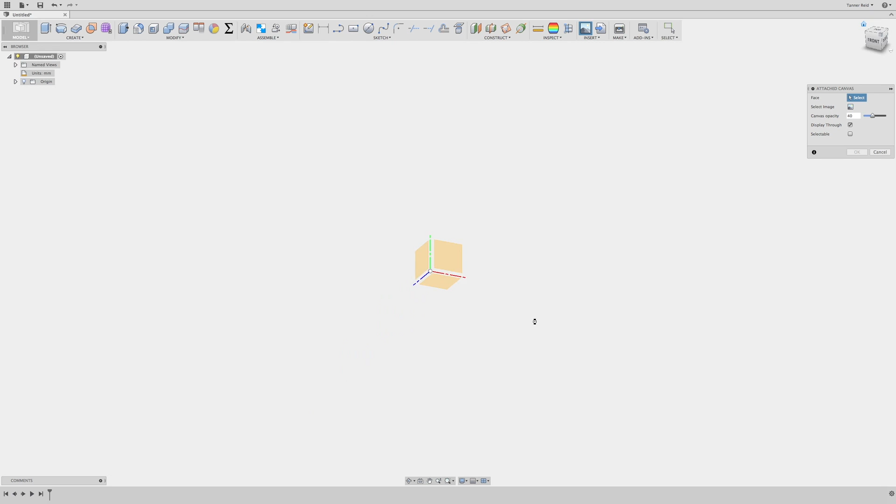So we're going to start off by inserting an attached canvas. If you haven't used these before, they're a really great tool. It lets you pick a certain face in the space. In this case, we're going to use one of our origin planes.

And when you choose an image, it's going to import that image into Fusion, and you can scale it and move it around and actually design off of it. So it's sort of like a reference in space for you to work from.

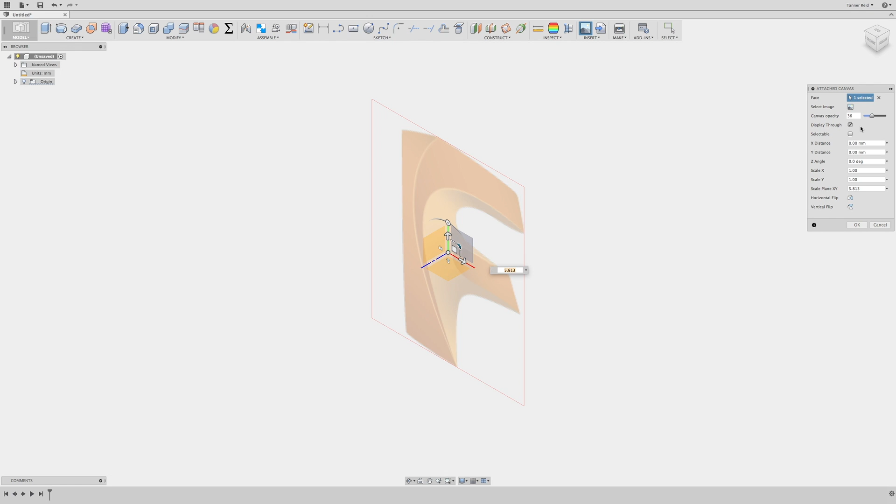On that, I want to make sure that I have my opacity at a good place. In this case, maybe something like 36, so that if we're designing anything behind it, we can see through it. And if we make sure display through is checked, we can design on top of it and still see it through what we're designing. So we get a lot of versatility in that sense.

So I can say OK. And if you haven't done this before, another great tool is to calibrate things. If you right-click it in the browser, you can choose Calibrate, and you can pick two points on the image. So let's say that from top to bottom it's 120 millimeters, I can type that in and Fusion will scale it for me.

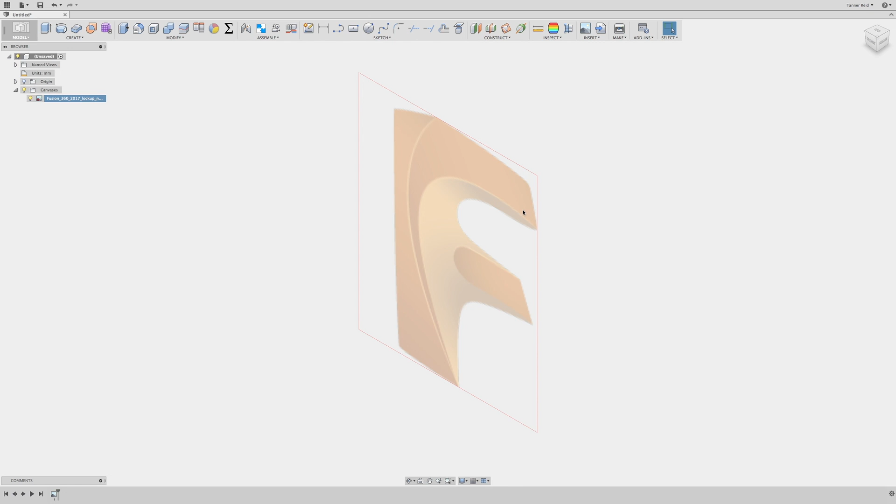For this project we don't really need a certain scale. It's more of an exercise, and in the end it'll be very scalable what we make, so that can all come later. But right now, just so you know, that's a great tool when working with canvases.

So what I want to do first is decide how I'm going to approach interpreting the three-dimensionality of this image. Right now, obviously, it's 2D, but we can see a lot of shadows here, and we can see where things might be sloping, how things connect to each other. I'm going to pick the way that I think is easiest and best for us to learn from.

If you want to play with it and find some other ways, feel free to—that's a lot of fun. But looking at it, I can see that this surface here and this surface are shaded very similarly, and they almost look like they're coplanar to me, like they're on the same plane.

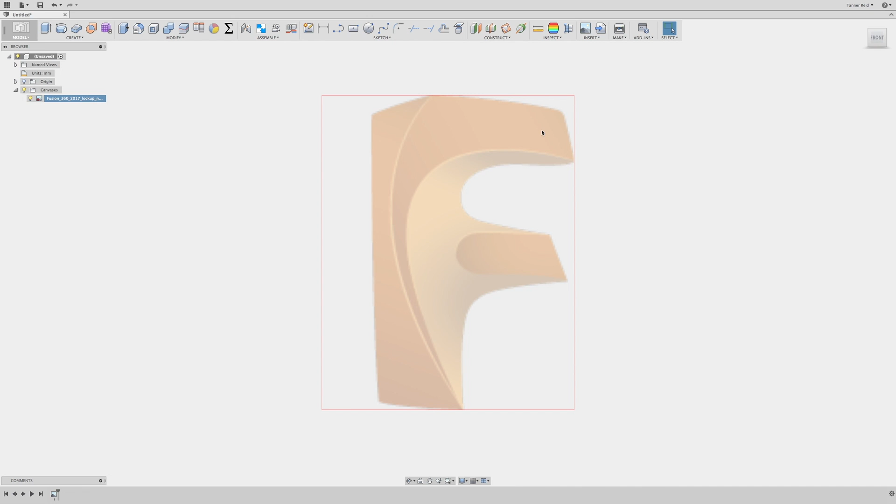So I'm going to assume for this case that these two planes are flat and lie on the same plane, and they're on top. So I'm picturing these being up high, and these edges being our lower surface, with these two surfaces connecting in between that top and that bottom. You'll kind of see as we go what I mean by that.

But to get started, I'm going to go to Create, and I'm going to choose Create Form. That brings us into the sculpting environment. And I'm going to go under Create, and I'm going to choose Face.

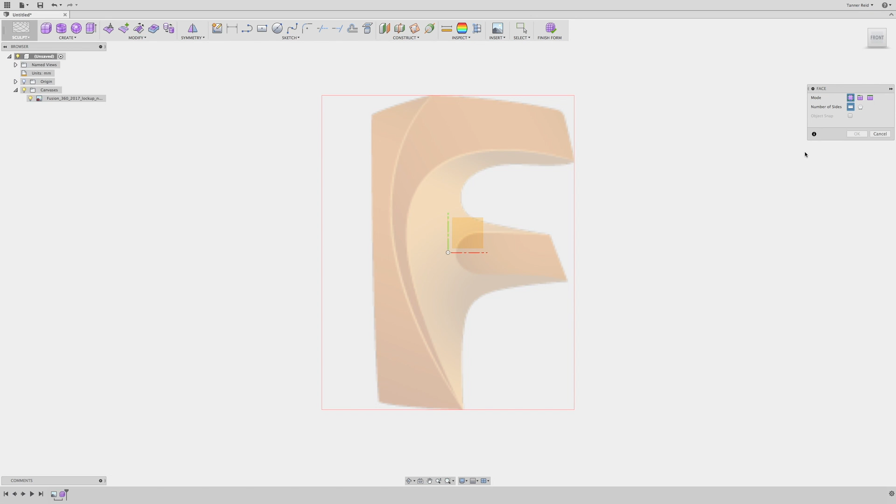So when you're doing faces, you want to pick a plane to start from. And I'm going to zoom in so we can start with this little arm that's here. Faces just let you click on four different points, and it builds a face between those four points. So I'm just going to make two rectangles to represent the main part of this.

And to make this curved part, I want to make a series of triangles, sort of like four radial triangles coming out to represent that. But those four triangles need to meet at a center point that's in between these two rectangles.

So I'm just going to go to Modify. I hit Escape there. I'm going to go to Modify and choose Insert Edge. And if I double click, it's going to give me a line that's halfway between these.

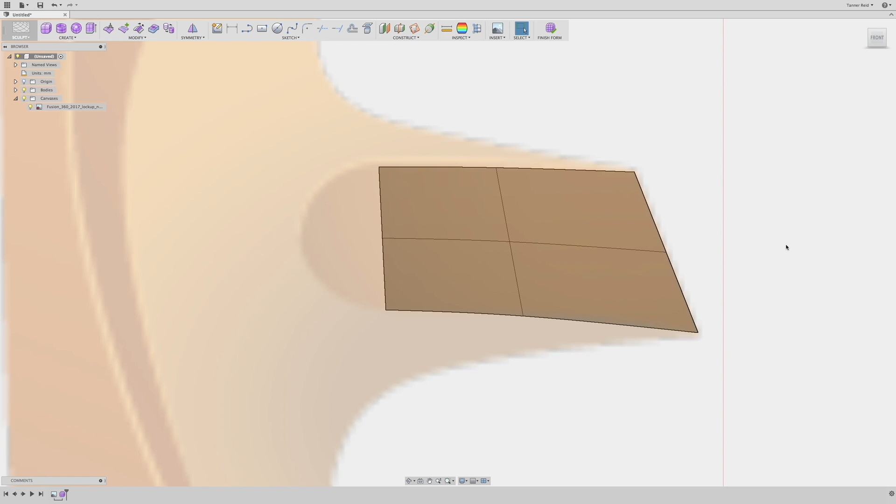And when I click OK, it'll put that in there for me. Now I can go back to Create, choose Face, and choose that same plane we're drawing from in the beginning. I can now go in and make my 4 triangles that come out to this point, and bring them back to intersect right there.

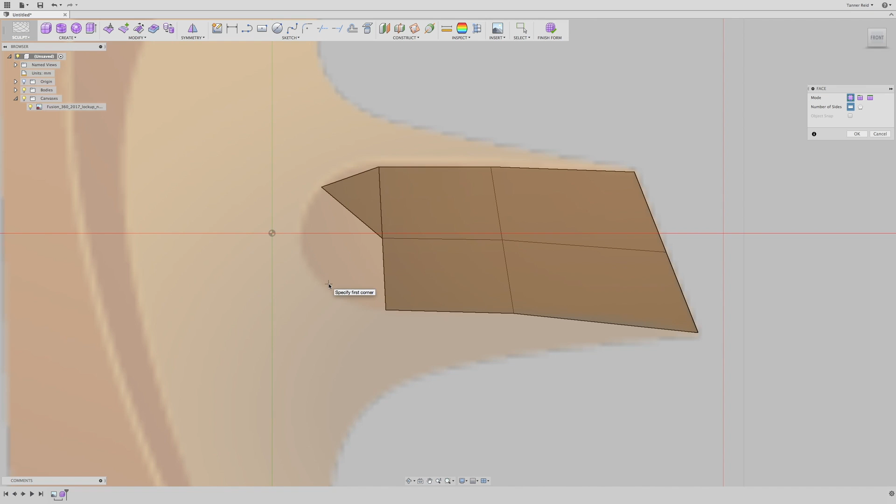Remember, we were working on a tool that gives us 4 different points to make these T-spline faces. But if you bring your 3rd point back to your original yellow dot, that's going to give you a triangular shape instead of a quadrilateral. So you can work with triangles just as easily as you're working with rectangles.

So I'm just going to build out 4 of these triangles right there, and then I'm going to say OK. Now when I say OK, it should have gone through and given this a curved surface. That's what we would expect if we were building these faces—we want to have these tangential lines between them.

But it didn't. It left it in a boxy shape, and the reason for that is something is wrong. If I look here, I've got a line that's thicker than the other ones, which means it's probably not connected at one of the points—I didn't click correctly to weld them together. But there's a great tool: instead of figuring out what went wrong, I can go to Modify, choose Utilities, and use the tool called Repair Body.

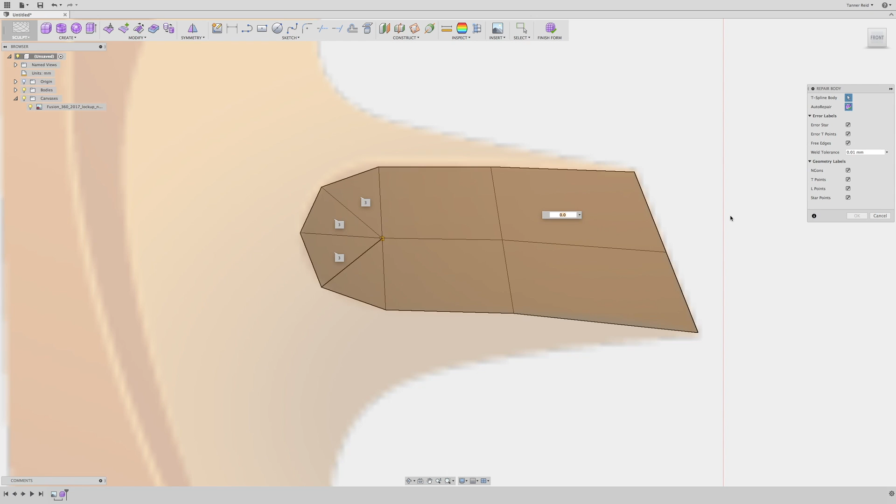With that, I can click on this shape I've made, and you'll see a little star show up, telling you that's probably where your problem is. When I clicked on Auto Repair, it welded those vertices together to make them into the shape it figures you probably want, and now we've got that curved surface going around, so we know this is now a watertight surface.

So if I click on OK, I can go up to Edit Form, and just move these points around to match up with the back canvas that we have. So we can keep referencing this image we're working from.

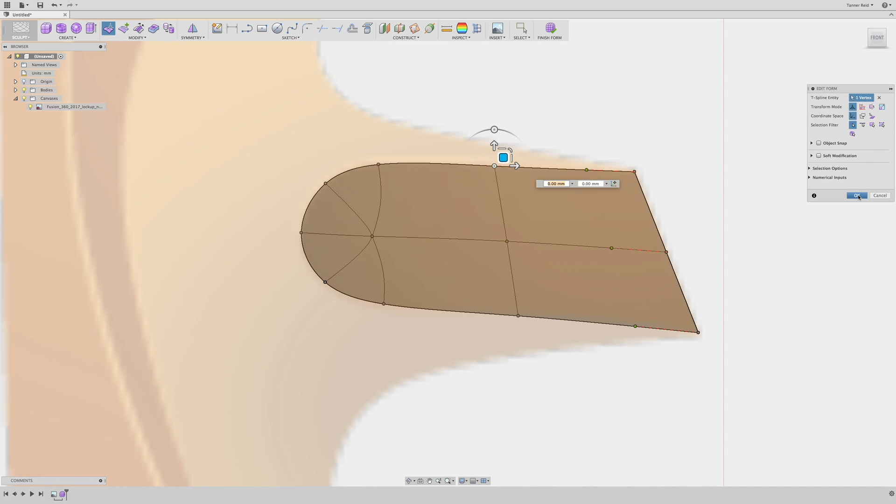I'm just going to try to get it roughly right. Again, later at any point in the process we can go through and define these to be any other positioning or alignment. This looks good for now, so I can say OK. And if I zoom out, you'll see we've got that first top surface there, lying flat right there.

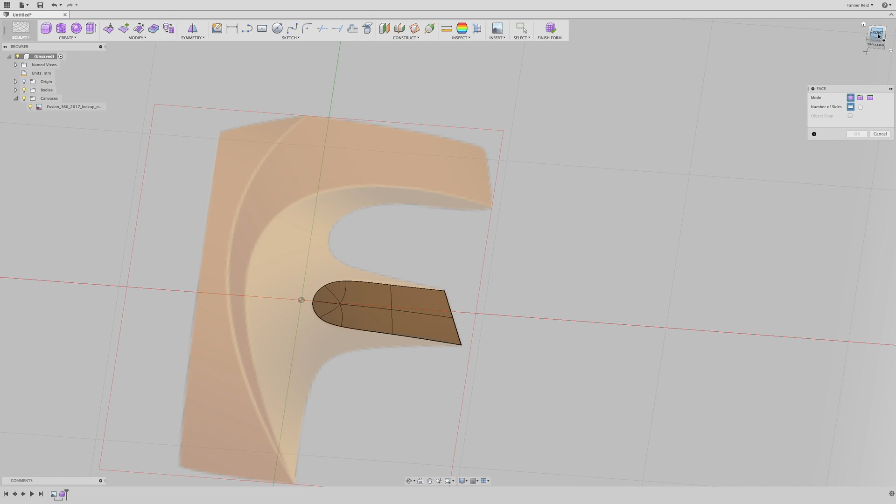So the next thing I want to do is make another surface that's equally flat, or on the same plane, right here on this top piece. To do that, I'm going to go to Create, choose Face again, and choose the same back face, or plane, that we were designing this one on, and come in and start drawing out 4 rectangles to make up this top arm.

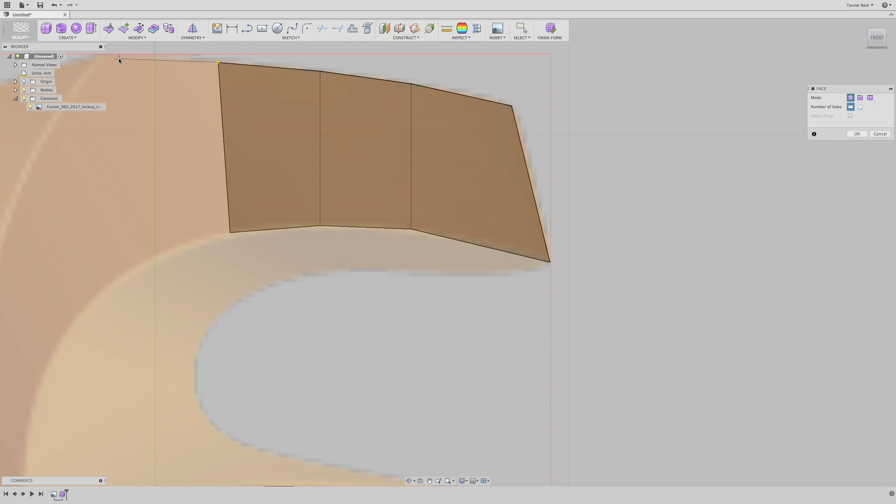So I'm going to go here. Let's see—and again, these can be very rough, they don't have to be perfect. Bring that around. You can see the top of that starting to shape up. And then from there, I'm just going to take this all the way down.

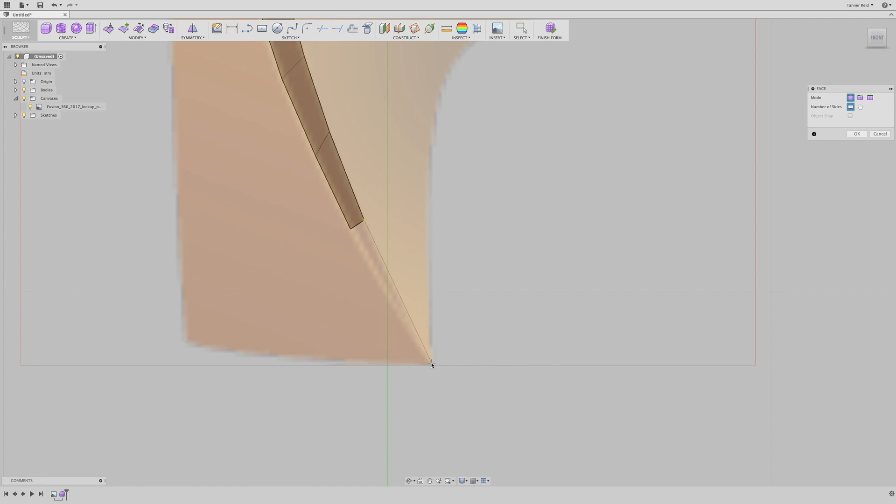And then for the last one, I'm just going to choose a triangle instead of a rectangle so that we come out to that point. And there we've got our 2 flat surfaces on the top. And if everything worked out, that should make it curved.

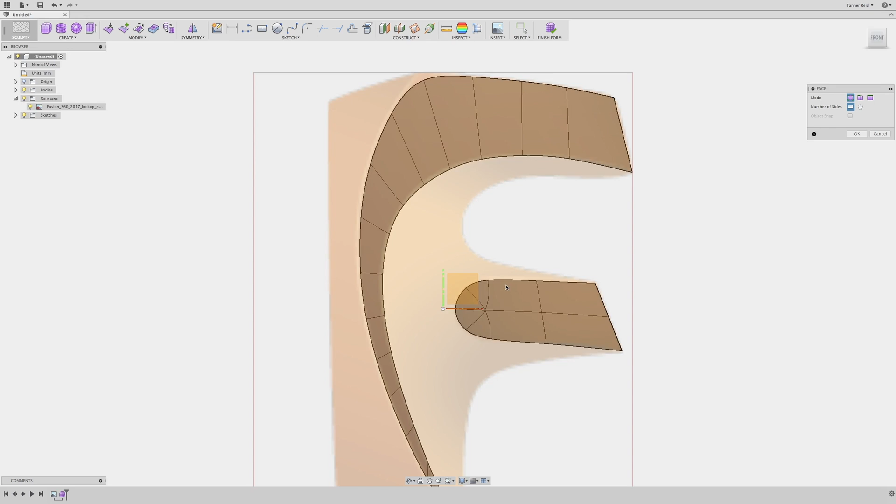Excellent. So the next thing we want to do is shape out these 2 surfaces that go in between them. I'm going to start on this left side because that's a lot easier. What I'm going to do is the same thing I just did: go to Create, say Face, choose that back plane, and start by clicking on this shape, that corner there, and coming across to this point.

And this is important to note—I want this corner to be a sharp edge here, so I'm making a rectangle that has that corner on it. If instead you had 2 points coming together, so if I came across and did a line here, that would end up making a curve across that surface, but I want to keep it a point. So I'm just making sure I have a corner rectangle here, which gives me a triangle on this piece. And from there, I'm just going to continue going down and designing out the edges.

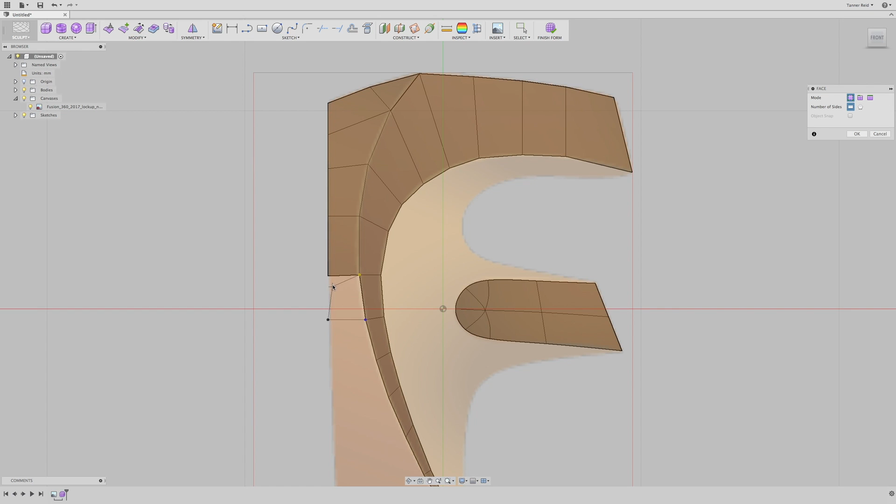So I'm going to finish this off the same way I started. I'm going to make sure I've got a rectangle that comes to a point there in the corner, and then fill in my two triangles that are left over to finish out that surface.

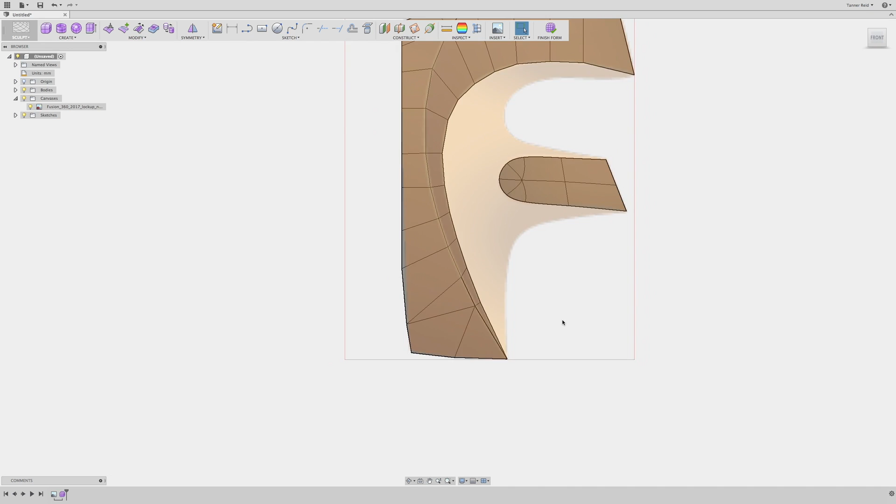Once I've done that, I can say OK. And it looks like it brought it back into box mode. So what I'm going to do is go to Modify, Utilities, and Repair Body. If I click on it, you'll see two different points that it's bringing up. I can say Auto Repair, and hopefully that'll clean it up, and it did. That's good, and I can say OK.

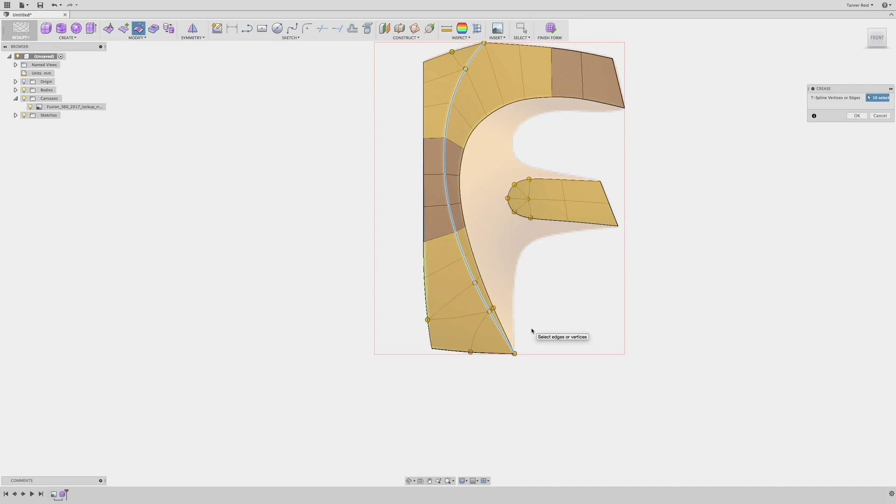Now if you'll see when it comes out and makes those curves, it sort of shifts everything over. But if I double click on, let's go to Create Modify first and say Crease. If I double click on this line, it's going to select the entire edge, and I can also choose the two edges that come off of it there. Now we've got a creased edge that goes along that same path that we drew. So from there I can say OK, and now we've got a nice smooth line. You can kind of see our canvas still showing through, and it's a pretty good relationship there.

The next thing I want to do is just make sure I clean up this edge a little bit. So I'm just going to take our points and shift them over a little bit, and make sure that it aligns with that little bit of a curve that happens as we go up the body of the F. These things, obviously, are as good and accurate as you want them to be and want to take the time to do. They can be as artful or thrown together as you have the time for.

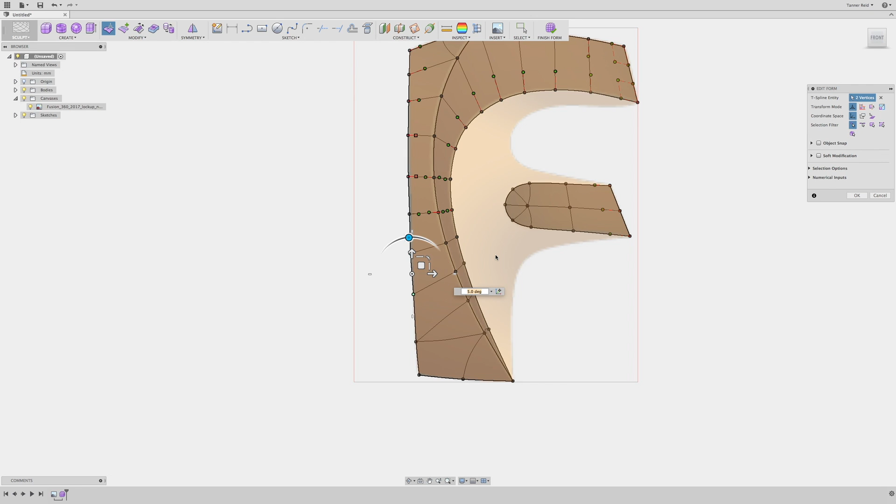I'm just throwing them together rather quickly, so they're not going to be perfect, but you get the idea anyways. So we can bring that over. What's that, could be like five degrees maybe, something like that. All right, good. So you've got the outside of the F, we've got the two planes that are coming together here.

And what we have to do now is design the surface that goes between them. So if you can imagine, if these two are up and this one is sloping down, then this surface is going to have to slope down and then back up to meet the new plane. So what I'm going to do is draw a sketch that defines for me where I want that trough to lie, and then I'll start sculpting around that.

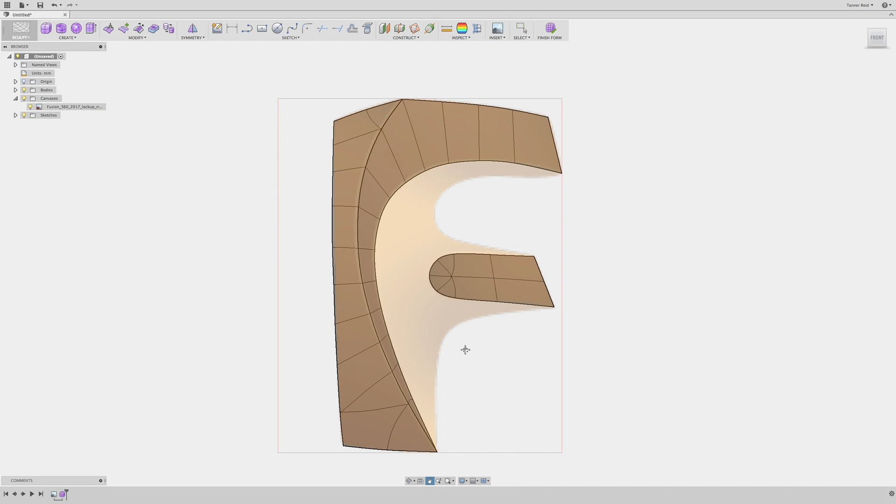So if I go up to Sketch, I can say Create Sketch, and I can choose that back plane again. Now I just want to draw a spline for where that's going to lie. So if I go to Sketch, I can choose Spline. I want the downward sloping region to sort of come off right here, and I'm just going to pull this over something really rough like this.

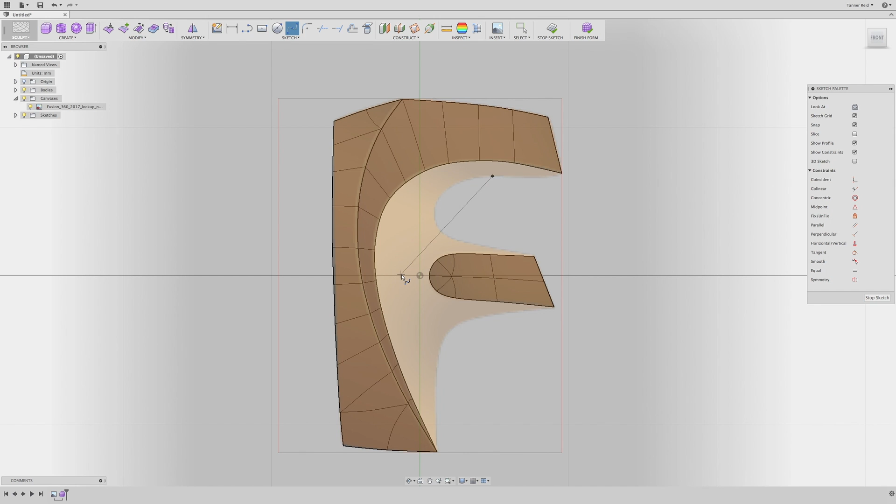Once I do that, I can take these edges here and sort of twist them to represent the shape that I'm looking for, which in this case is something sort of like that. So the idea here is that everything on the left side or above this line is going to be sloping down, and everything on the right is going to be sloping towards that center line as well, sort of like where a roof comes together where you have a lower spot.

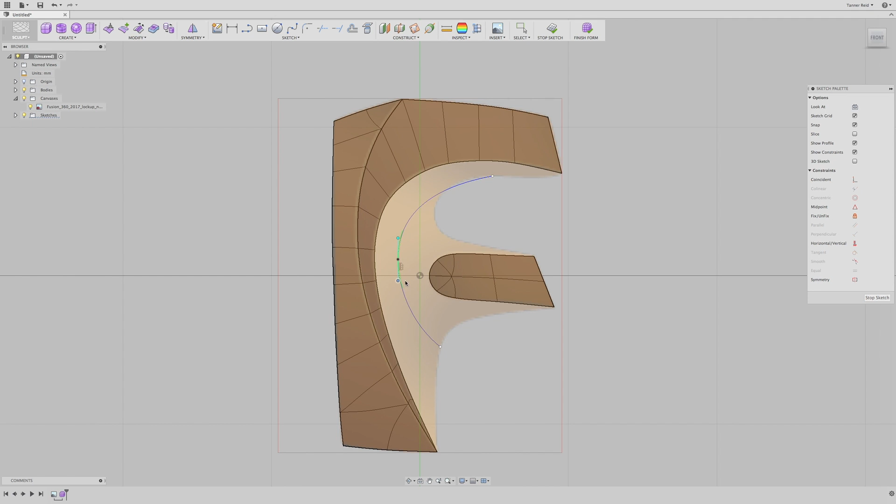So if that's my trough, I'm going to adjust it just a little bit, be a little bit more. Take off this horizontal constraint and spin it a little bit, zoom in, something a little bit more like that. That looks good, so we've done that. I can say Stop Sketch.

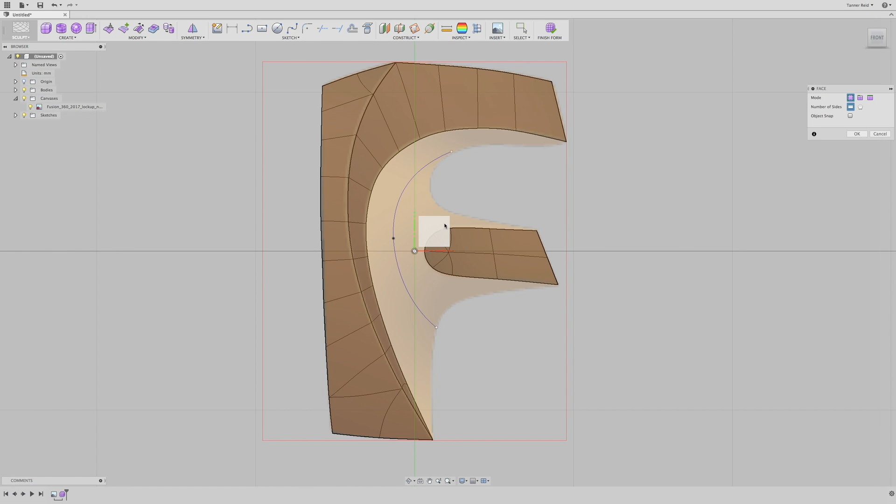Now I have a reference curve that I can use to design my faces to that trough. So I'm going to start with what's easy. I can go to Create and say Face, choose that same plane again. What I want to do here is just create one that slopes down and comes across out from, sort of radially from this semicircle that we have here on our flat surface already.

When we come across, this is going to get a little bit tricky because we're going to have to start making triangles for things. So if I've got a rectangle here, I'll find that we want to come across to this point, just like that. And then I can make triangles, a rectangle for this point, and finish it off with a triangle on this side. So that looks good, I think that'll probably shape up pretty well.

On the other side, I know for sure that I can put a triangle in here. That one's pretty obvious to me. And then we can put in a rectangle as well. But if we're looking at all of this space, it gets a little bit wonky kind of quick. So what I'm going to do is go ahead and start filling in. This one looks definitely like it's a rectangle. The next one can probably also be a rectangle before we start getting into a triangle.

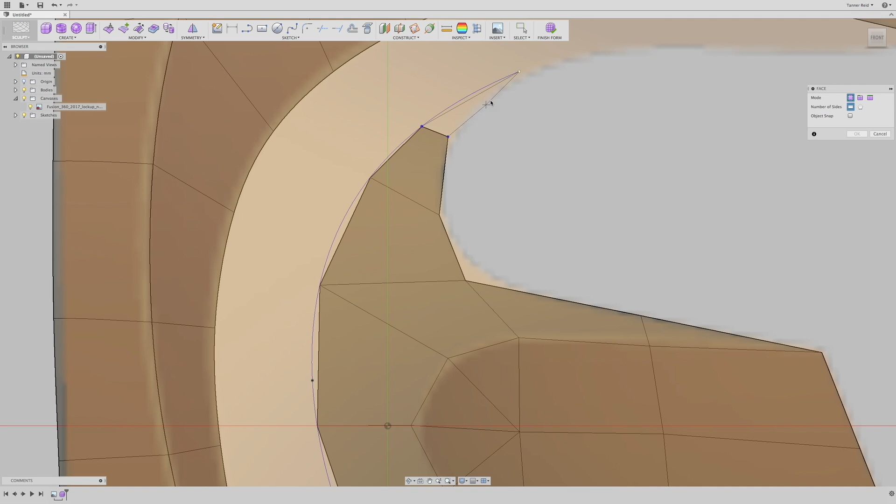And then we'll do one more. I'm going to choose the end of that spline and come across to match it. And then I'll say okay. Good, that looks like it's following it pretty well. It's not perfect, I'm going to scoot it in just a little bit there.

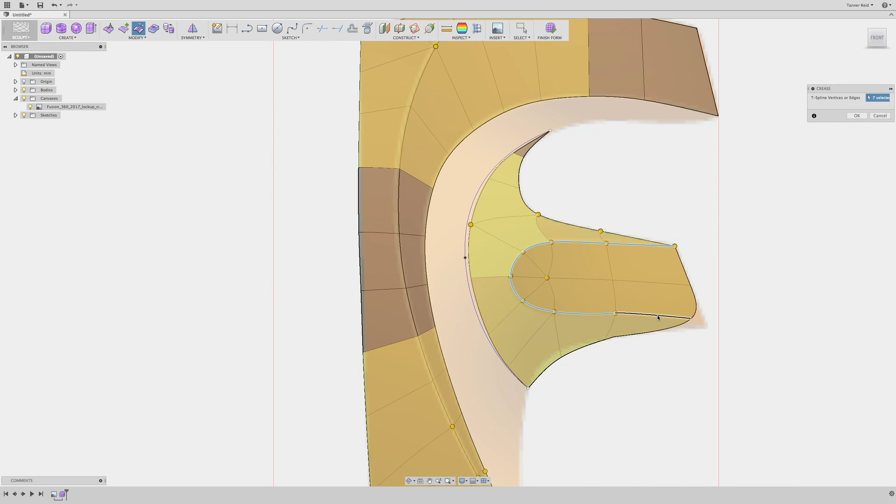Now, let's crease this one first. Let's go to Modify and say Crease. Let's go ahead and crease these edges. That way we get back our original shape and it keeps them flat there. Say okay. Good, so that's still lining up and we can kind of see our surface start to shape.

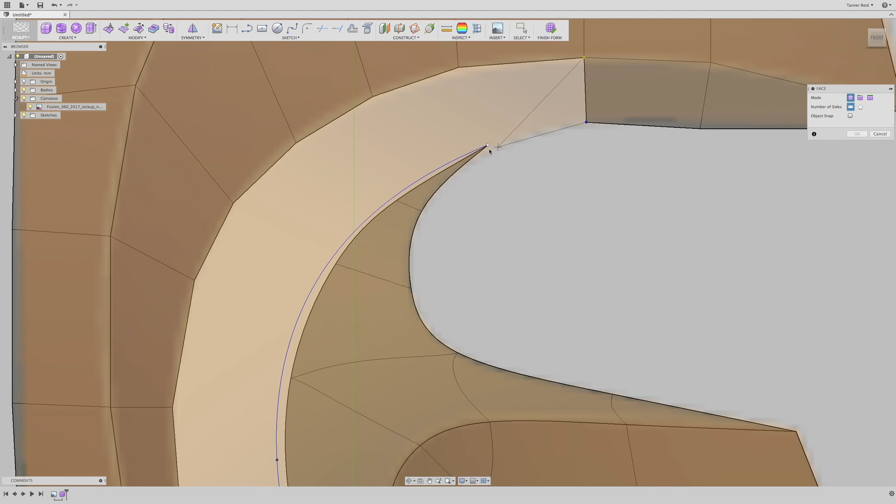From there I want to go to Create and say Face again. This time I want to choose that same plane and start building out what that downward sloping face is going to look like. So on here I can just zoom in a little bit, pull this guy around. Okay, and then let's go back, face. Bring that over there.

So the next thing I want to do is go ahead and connect a couple of these points. But you'll notice now that we've got sort of a different amount of rectangles on this side as we do this side, and that's okay, that just means they won't translate directly across from each other. So we can go ahead and make a triangle here instead of a rectangle, and then maybe put a rectangle in at this point. We might need another triangle. Let me count - yeah, let's do another triangle across here. And then the next one can be a rectangle.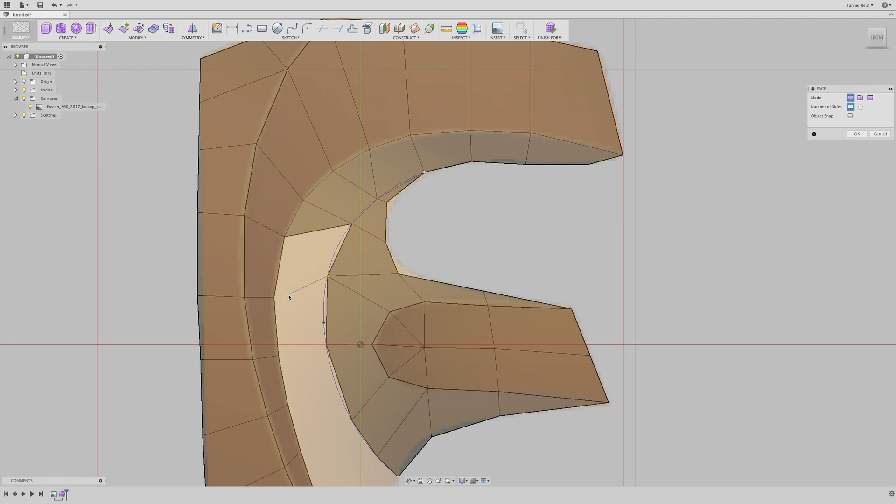All right, that looks good. And if we say okay, hopefully those will all curve out without any problems. They did, excellent. Okay, so from there, now we need to go ahead and crease our edge to go along that flat line there.

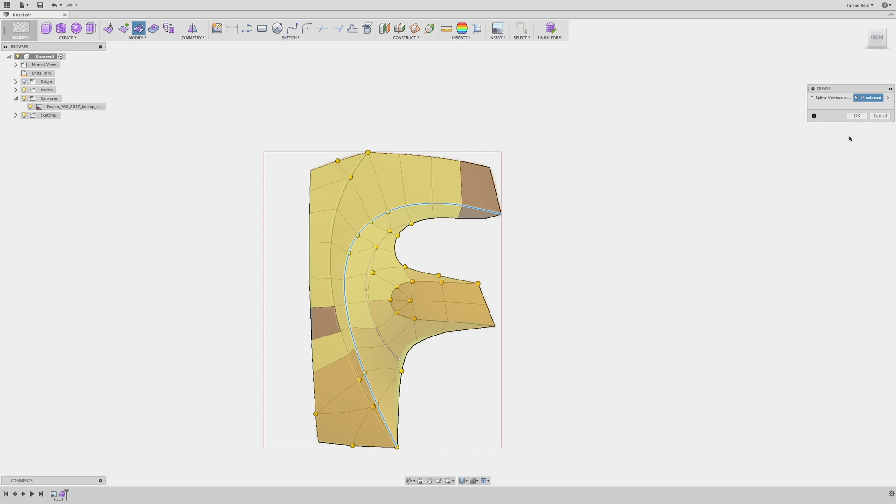So I'm just going to double click on this edge, it's going to select all of them. And if I go to Modify and say Crease, that'll give us that edge back. Say okay. And now for the time being, I want to crease that troughed edge that I put in there, and that's mostly just for me to see sort of how that curvature is going to look. It's just easier for me to wrap my head around.

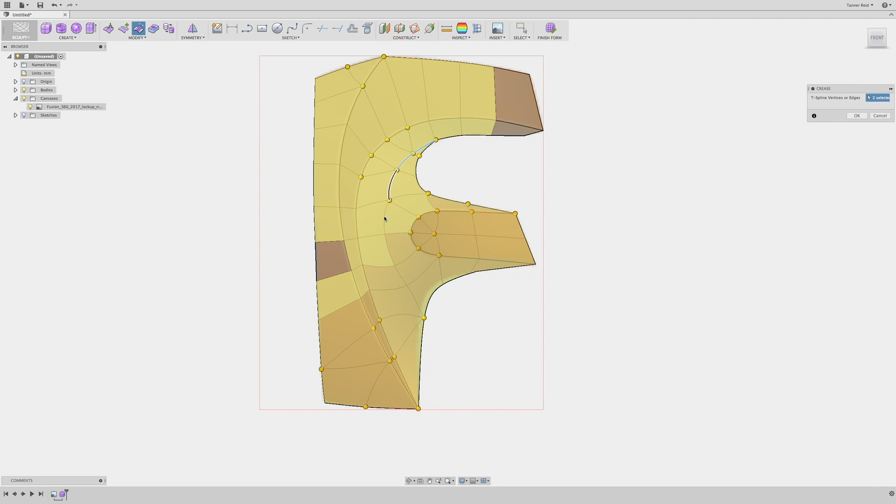So I'm going to hide my sketches and go back to crease. And I'm going to choose these lines coming around just so we can see what they're going to look like. There we go. And then I'll say okay.

And so now if I hide my canvas, you can see that we've got the basic shape of what we want the contours to be. And if I look at my creased edge here, that looks like a pretty smooth curvature. I'm kind of happy with that. The top piece looks good, this one looks good, I think our shapes are good.

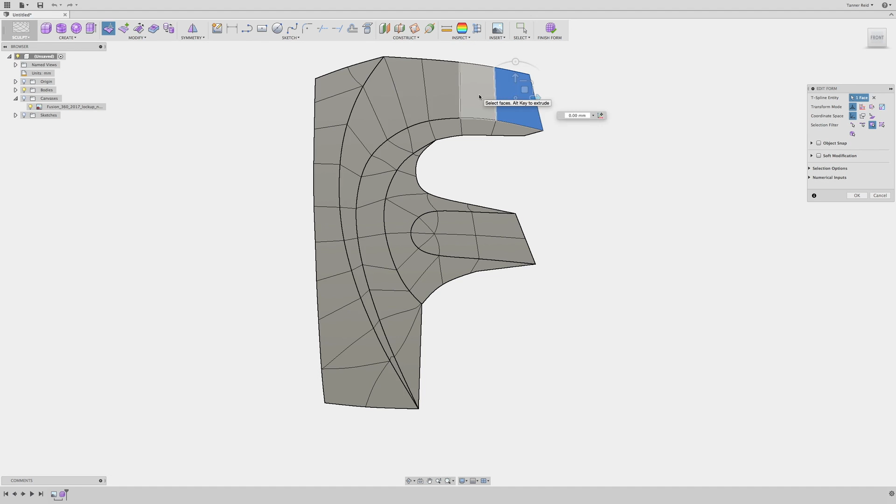So what I'm going to do now is raise up these two surfaces that we said were going to be higher than the other ones. So if I go to Edit Form, I can choose faces here on the selection filter. And if I shift double click the one next to it, it's going to do the entire row going across. And I'm going to hold down shift and then select these remaining pieces as well.

And now if I go to the side view, in this case the bottom view, I'm going to drag that up. And you'll see now where those shapes have come up off of those base profiles that we made. So with that, I'm going to say okay.

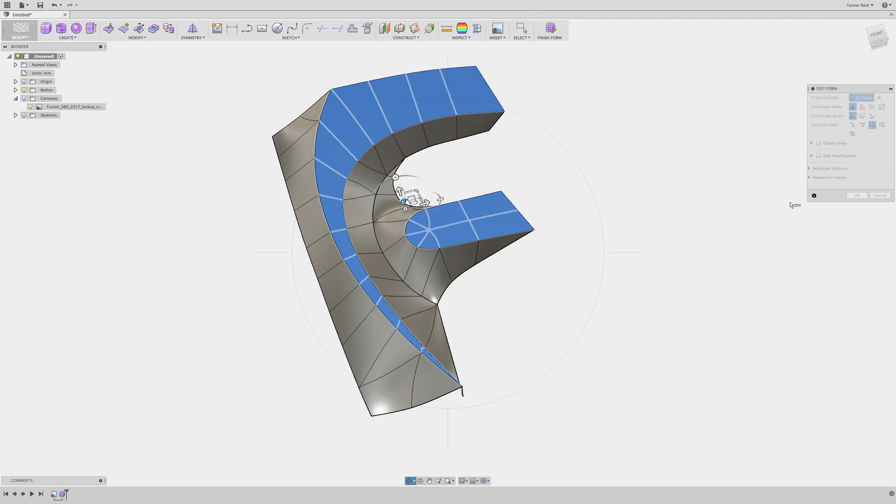And now I'm just going to look around and kind of see what our curvature looks like, where there are weird points. I think everything looks okay. So what I'm going to do now is double click on that creased line that we had, and I'm going to say uncrease. And then I'm going to say okay.

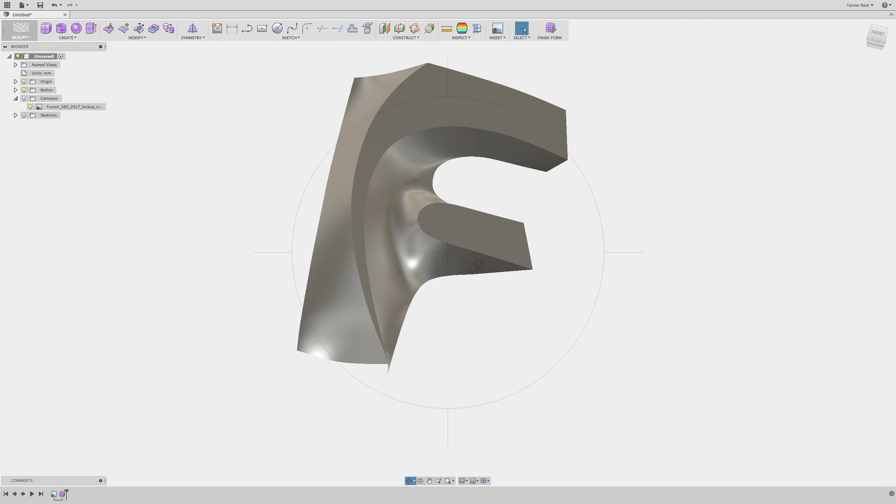And I'm going to show just shaded rather than shaded with visible edges. And it looks like we've got a pretty good curvature going across there. I can go in and edit all of those control points to see if we can get it smoother. You might find places that look a little bit weird, like this looks like it might be a little bit tight in that corner. So I can go back to visual style and say show shaded with visible edges.

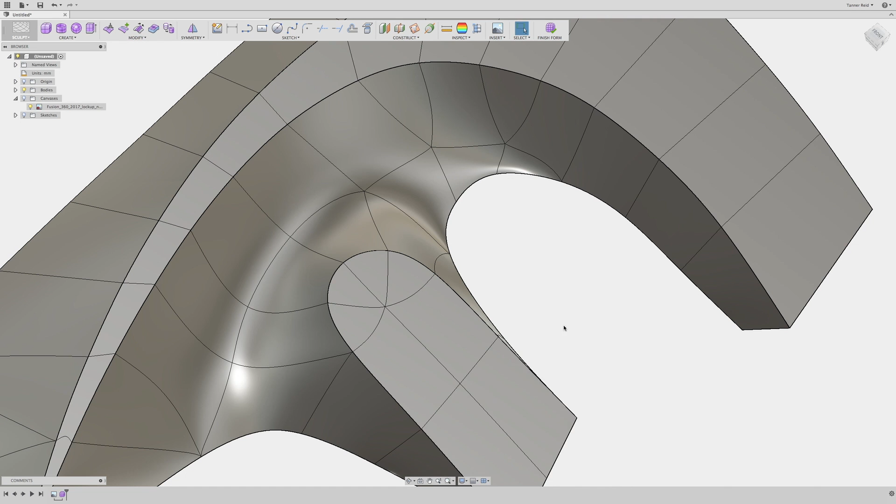And maybe that would mean that this point should move over a little bit - let's choose point. Maybe this point needs to move over a little bit to sort of alleviate some of that stress that's in the corner there. And again, you can also turn your canvas back on while you're doing that. Either way, you can kind of work out the curvatures. I think this one looks fine.

We don't have anything that's really pinching off weird. Everything looks pretty smooth, and so from that we have a surface of the new logo. I'm just going to make it three-dimensional for you real quick. There's a ton of ways to do that. If you look at the way we designed it, we've got some holes on the sides.

I want to do a boundary fill that caps off each of the edges and closes it off on the bottom. So what I'm going to do is go to Sculpt, and I'm going to choose the patch environment. In the patch environment, we never exited our form, so I'm going to say return to the form because it's telling me there's an error in our form. So I'll say return, and we're going to find what's wrong with this.

It says coincident vertices may need to be welded together, so I'm going to say close on that. Then I'll go to Modify, Utilities, Repair Body. I'll choose this guy and let's see if it gives us some pain points. There's a couple—I'll say auto repair, and see how it fixes it.

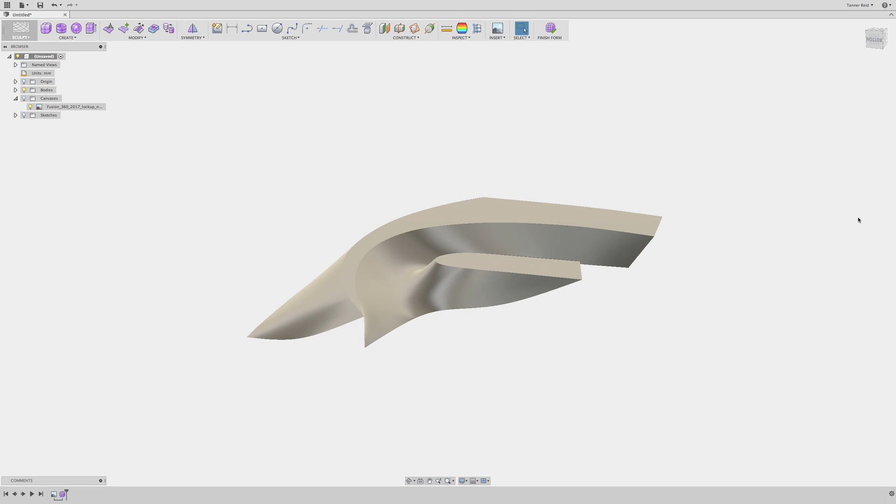Say okay, and then let's go in here and show shaded with visible edges. Then we'll say finish form. Let's see if that fixed our problem—it did, so we're back out now. That fixed whatever was going on here.

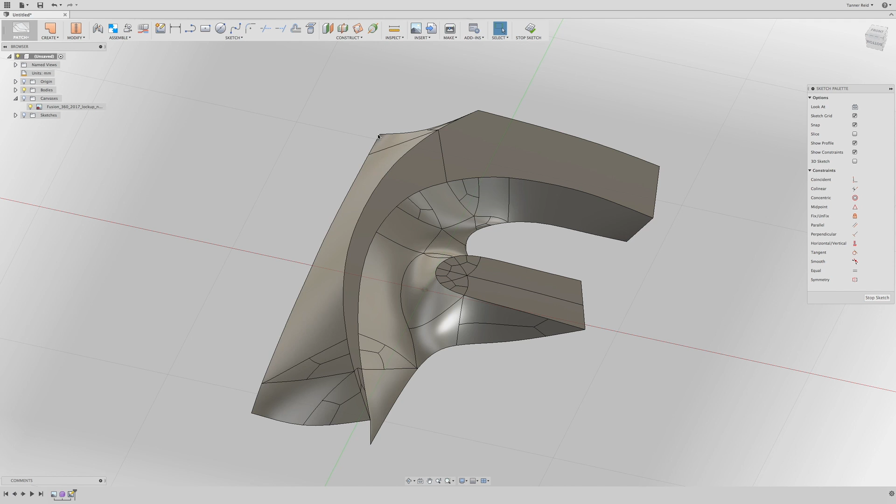So then I can go to my modeling space and actually choose patch, and what I can do now is create a sketch. I'm going to put that sketch on the bottom plane—this is the same plane that we put the canvas on, the same plane that this edge exists on. I'm going to go to Sketch, and choose Project Include and Project.

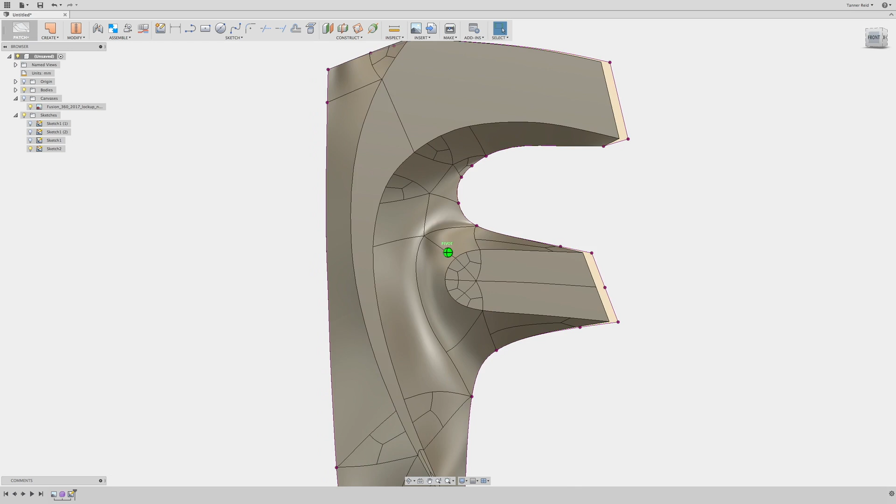That's going to let me choose a profile of the body. Right now it's showing my sketches are hidden, so I'll go back and hide my first sketches and just show the sketch I'm doing here, and say OK. Now I can say Stop Sketch, and you'll see from the top it's just projected that onto the plane below it. Then if I go to Create, I can choose Extrude.

Extrude in the Patch Environment is going to extrude a surface of the outline of the profile I clicked on, and then I can say OK. Now if you look, we've got a profile kind of surface outline with the top that we made in the sculpting mode, and we also have a plane that exists on the bottom, so we can do a boundary fill to fill all that in.

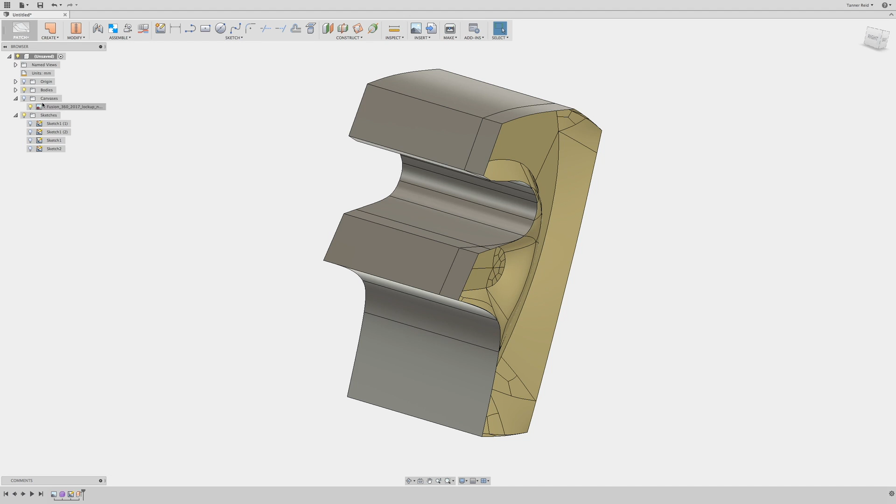So if I go to Create, I can say Boundary Fill. I can choose that outside piece I just made, I can choose the F that we created, and I can choose this bottom plane that we drew everything on. Once you have a volume that encloses anything, it'll show up there in green, and I can say Select Cells, pick that green volume, and say OK.

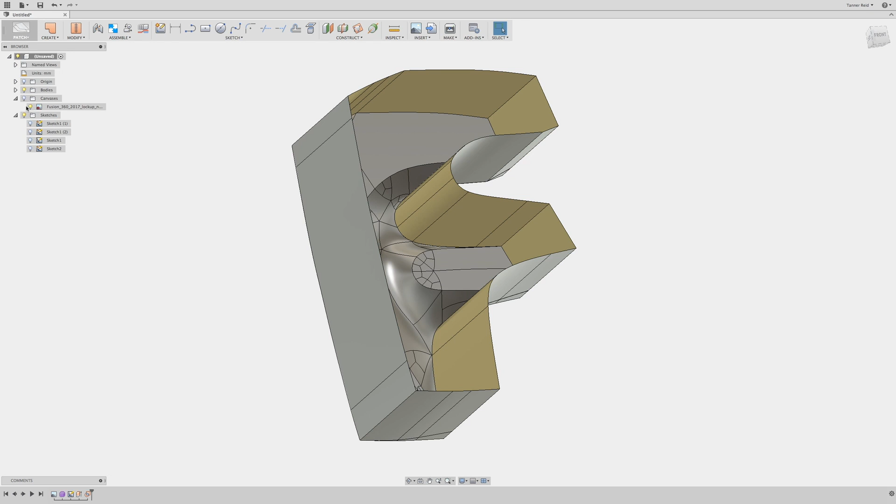Now if you look in our Bodies folder, we've still got our two original surfaces, but if I hide them, I've got one left over that's a solid body—that Fusion F. If you wanted to make this thicker or whatever, you can go into Model and say Extrude and pull that off. There's a bunch of things you can do with this now if you want to inlay it into something, whatever you're working with. But hopefully you get a good sense now of how you can design this model off of an attached canvas.

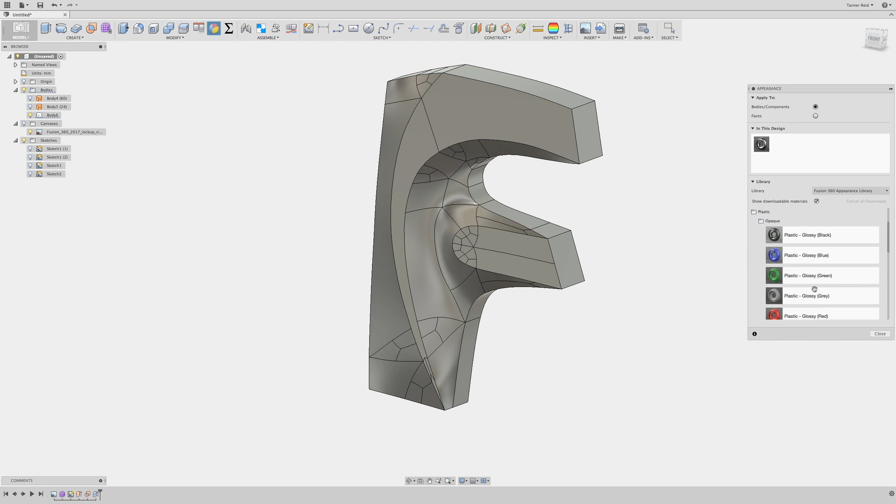And if you wanted to get really spot on, we can add a plastic appearance with Fusion's exact colors in it. So I hit A, which is a shortcut for appearance, and let's say I go to Plastic, Opaque. We can make this glossy yellow. If I double click it, I can type in Fusion's orange RGB values, which are 238, 136, and 34. Then I can say Done.

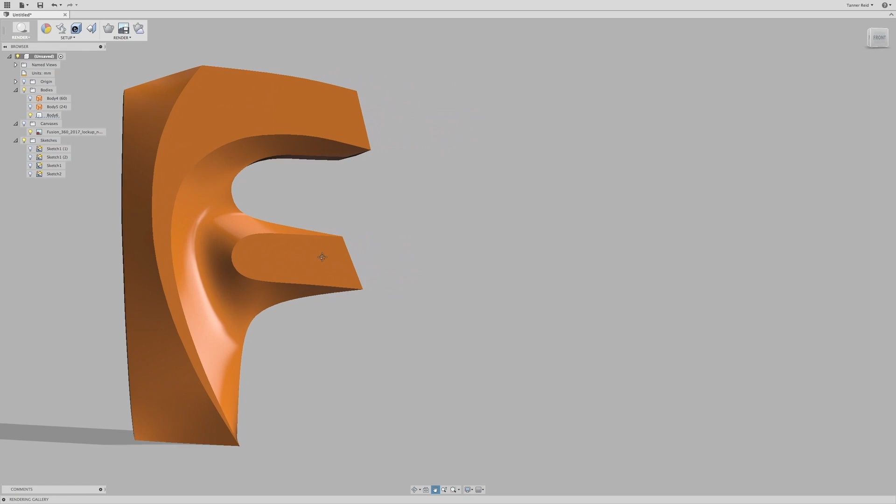Now we've got our Fusion F from just bringing in an attached canvas, tracing over faces with it in sculpting mode, editing those faces, pulling them around a little bit, and then finally coming out and making it a solid with a boundary fill. So, pretty simple process.